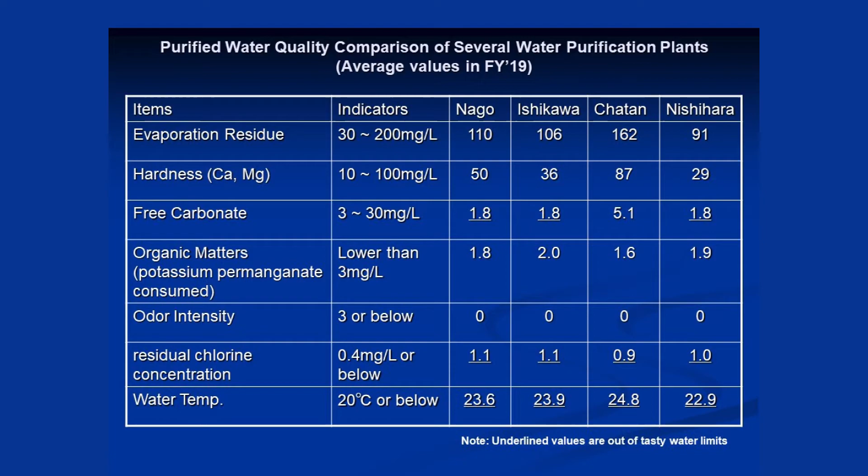Let me move on to the drinking water quality standards. I'll first talk about Article 4 of the Water Supply Act, followed by the basic principle in setting the standards, structure of drinking water quality standards, then methods and frequency of water quality tests.

According to Article 4 of the Water Supply Act, drinking water supplied through waterworks must meet the following requirements. First, it is not contaminated by pathogenic organisms, nor does it contain organisms or compounds that indicate pathogenic organism contamination.

Second, it does not contain toxic substances such as cyanides, mercury, etc. Third, it does not contain copper, iron, fluorine, phenol, and other compounds above an allowable amount.

Fourth, it is not abnormally acidic or basic. Fifth, it should not have foul odor, except that resulting from disinfection. Lastly, appearance should be clear and with no color.

Further details related to each requirement are prescribed by Ministry of Health, Labor and Welfare ordinances.

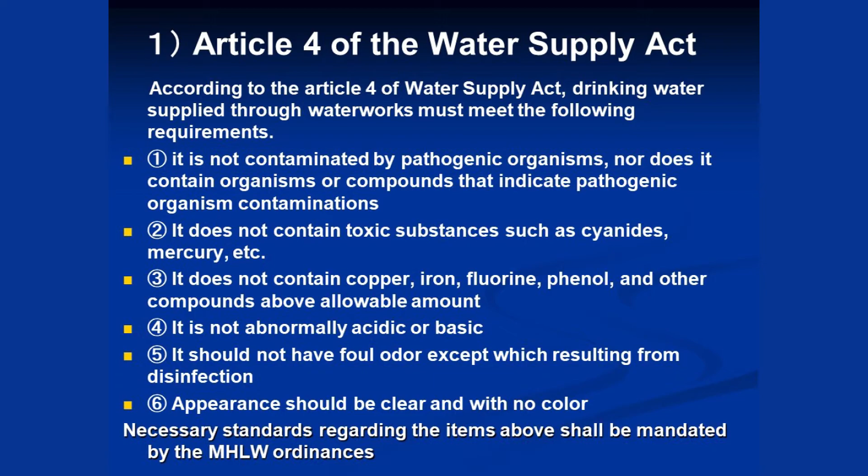Water quality standards are set under Article 4 of the Water Supply Act, and water suppliers are mandated to supply water that meets these standards.

In the water quality standards, items that are detected or can possibly be detected in purified water at the level of 10% or higher of the assessment value, which is equivalent to the WHO guideline value, are included. However, considering past history, chemical compounds such as mercury and cyanides are also included.

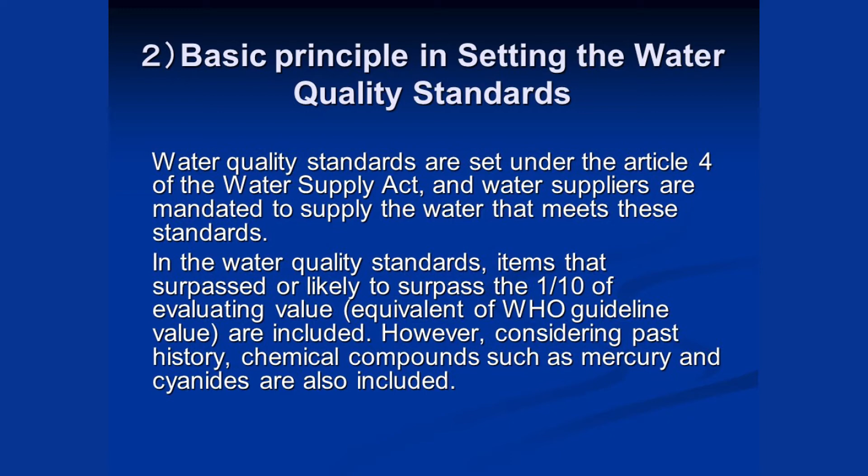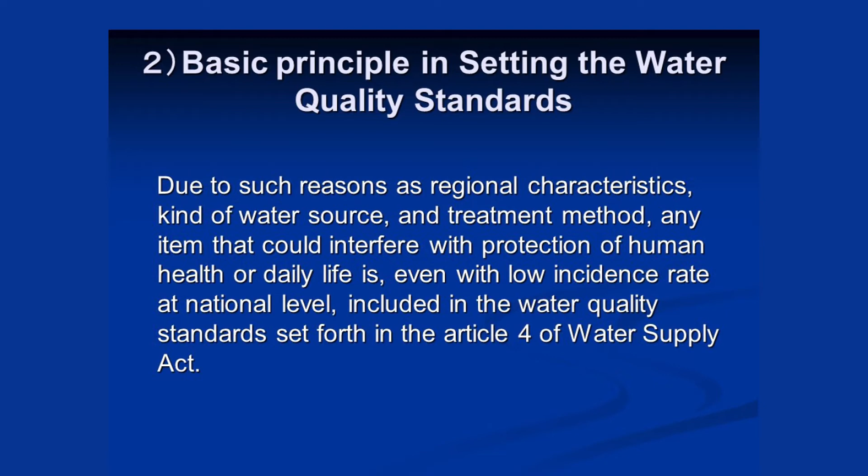In addition, due to such reasons as regional characteristics, kind of water source, and treatment methods, any item that could interfere with protection of human health or daily life is, even with low incidence rate at national level, included in the water quality standards set forth in Article 4 of the Water Supply Act.

Mandatory items in water testing required for all water utilities are limited to basic items. For the remaining items, some clauses in the Ordinance for Enforcement of the Water Supply Act permit each water utility to reduce test frequency or omit the test within reasonable limits.

Meanwhile, in order to ensure appropriateness and transparency of water testing, water utilities are obliged to draw up and publish a water testing plan required under the Ordinance for Enforcement of the Water Supply Act, Article 15, Item 6, with a list of items to be examined, or justification if omitted.

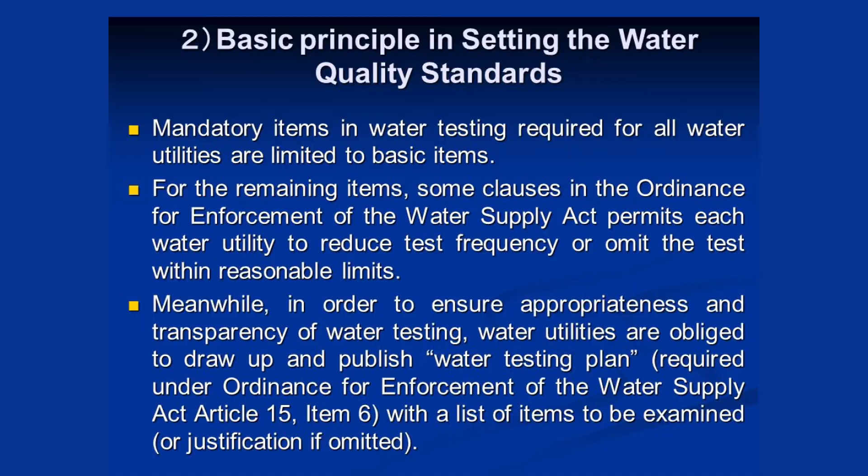The Japanese drinking water quality standard consists of 3 categories: drinking water quality standards, complementary items for water quality management, and items for further study. Let me begin with drinking water quality standards.

With the 2003 Ministerial Ordinance on Water Standard, drinking water quality standards were revised to include 51 items. The ordinance specifies standard values and testing methods used for determining water quality. Water utilities are obliged to supply water that meets these standards.

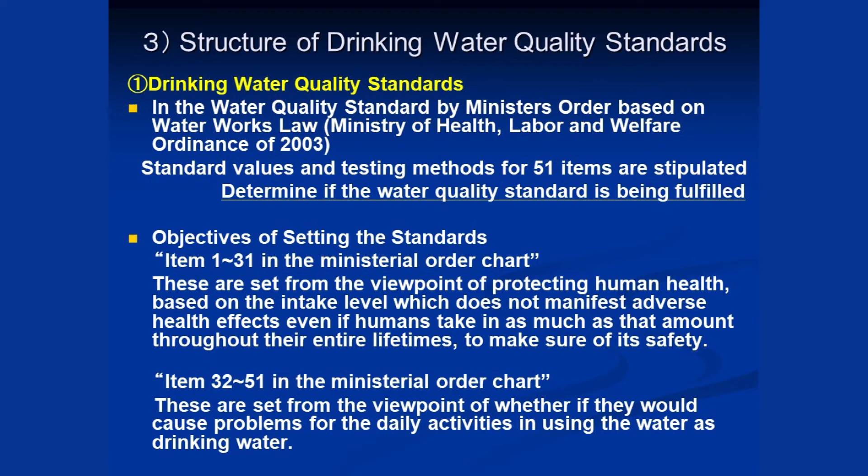Items 1 through 31 listed in the ministerial order are included from a health protection standpoint, based on the intake level that would not cause adverse health effects even with lifelong consumption. Meanwhile, items 32 through 51 are included as potential inconveniences for daily use, such as color and odor.

Potential inconveniences for daily use mean abnormal levels of color, taste, odor, foam, etc. High content of metals such as iron, copper, and manganese add color to water, whereas sodium and chloride ions influence taste. Meanwhile, anionic surfactants in detergents cause foam on water, and the presence of compounds such as phenol and geosmin causes odor.

Next, let me explain the complementary items for water quality management category. This category is created for certain items that require regular monitoring for water quality management, while they are considered unnecessary to be included in the drinking water quality standards, or their addition to the standards was postponed in relation to toxicological evaluations.

They have nevertheless been detected in the general environment, or have a potential to be detected in purified water in the future due to their large amount of use. In other words, this is a category for items with uncertain or provisional toxicity value, or insufficient detection value, for immediate addition to the drinking water quality standards.

Next, let me explain the items for further study category. This category is for items that cannot be classified into the two categories I've explained so far, because their toxicological evaluations are provisional, or their detection level and frequency in purified water are unclear. The Health Ministry instructed that necessary items be selected and tested in accordance with the local situation.

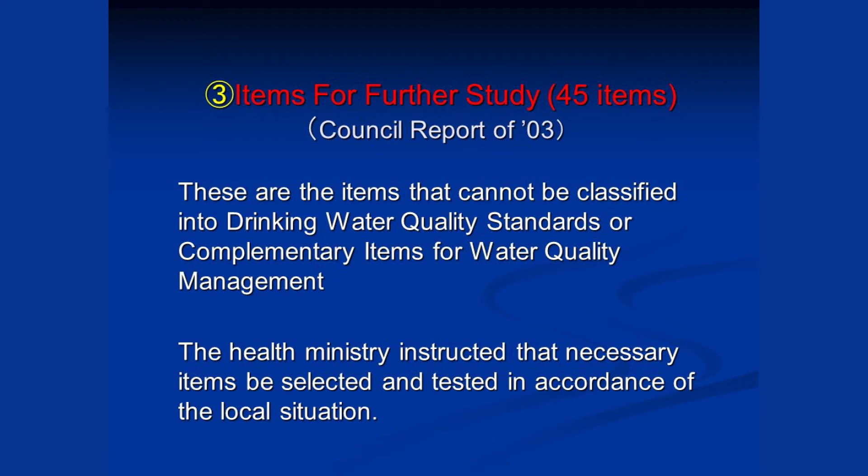Here are the current number of test items for drinking water. The drinking water quality standards have 51 items, in which 31 are related to health and 20 are related to desirable drinking water characteristics. The complementary items for water quality management have 27 items, including 114 agricultural chemicals categorized as one item. The items for further study have 45 items.

At our Water Quality Control Office, we conduct testing of 51 items for drinking water quality standards, 25 for complementary items, 79 agricultural chemicals, and 35 additional items that we independently designated.

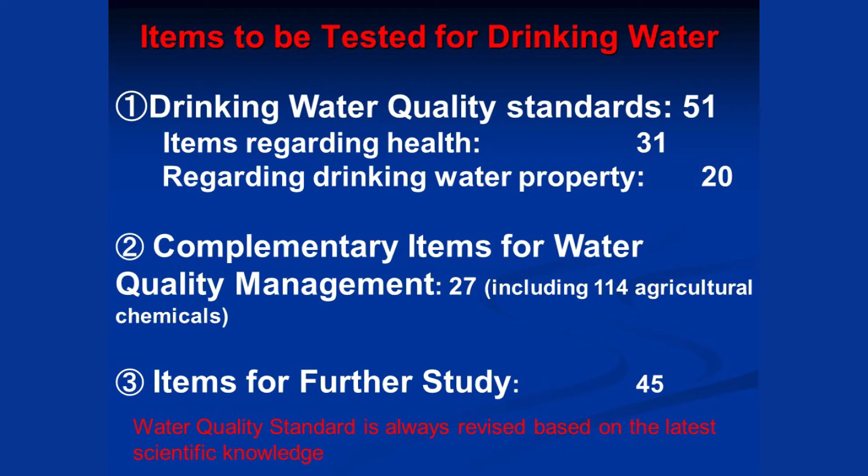When such information is obtained, they are classified into the higher complementary items for water quality management category. Then, whenever necessary, they can be reclassified into the highest drinking water quality standards. This process is reviewed every year with the latest scientific knowledge, and existing testing items and standard values are revised almost every year as well.

Let me move on to the next topic, our water quality management system. As a general rule, we conduct testing for items of the drinking water quality standards and the complementary items for water quality management by ourselves, for the following reasons.

Prompt response to pollution incidents. Reflecting test results to water quality management without delay. Maintaining and improving our technical skills, and prompt implementation of required actions for management.

When water quality incidents at water sources happen, such as mass fish die-offs, outsourcing water testing will take too much time for identification of cause and recovery. By conducting the testing by ourselves, we can respond to incidents promptly and avoid supply interruptions as much as possible.

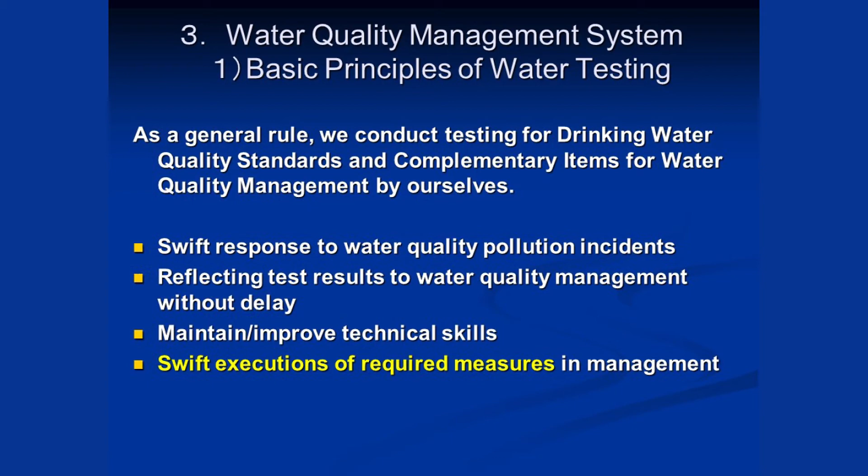Prompt testing also enables us to take required actions to prevent failure to meet drinking water quality standards and ensure safe and quality water supply.

As a measure to ensure accuracy and reliability of water testing, we obtained the WaterWorks GLP certification in May 2009. GLP stands for Good Laboratory Practice. The WaterWorks GLP is a set of standards for a laboratory to prove their proper execution of tests and analysis, and those labs that meet those standards are certified.

Apart from the WaterWorks industry, other industries such as food, pharmacy, and chemistry have also established GLP for their labs. WaterWorks GLP applies the concept of GLP to drinking water testing in order to ensure the accuracy and reliability of results from Japan WaterWorks Association certified water testing.

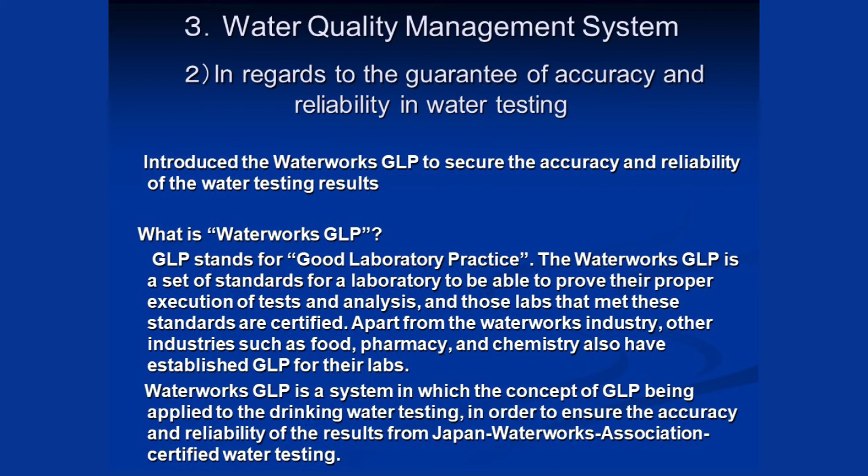OPEB's Water Quality Control Office manages water quality for all of our source waters and purified water. At the office, we mainly conduct monthly ministry-ordered tests for all source waters and regular tests for raw, purified, and distributed water from every purification plant. We also conduct research on source water management and treatment methods.

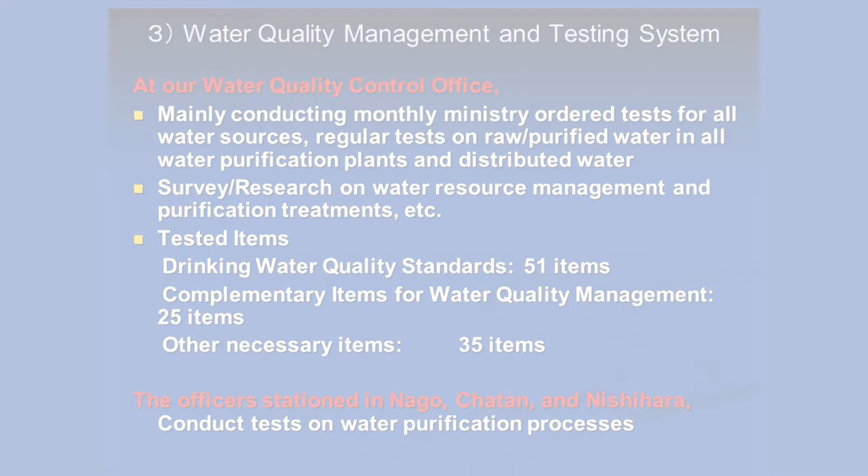In addition, Nago, Chatan, and Nishihara water purification plants have one water quality officer stationed for testing required during the treatment process, as well as for helping plant operators to solve issues with the treatment process. From here, I explain issues with our drinking water quality. Let me start with water sources. First, I'll talk about rivers.

Rivers in the northwestern part of the island are a good water source with no pollution from gray water or factory wastewater. However, we need to be cautious of red soil runoff after rain, which tends to cause an increase in turbidity and organic matter concentration, as well as occasional increases in the odorous substance geosmin. Regarding the Gabusoka River in the northern area, it is unsuitable as source water due to pollution with gray water. We discontinued water intake from this river due to issues of pollution, water flow rate, and saltwater intrusion.

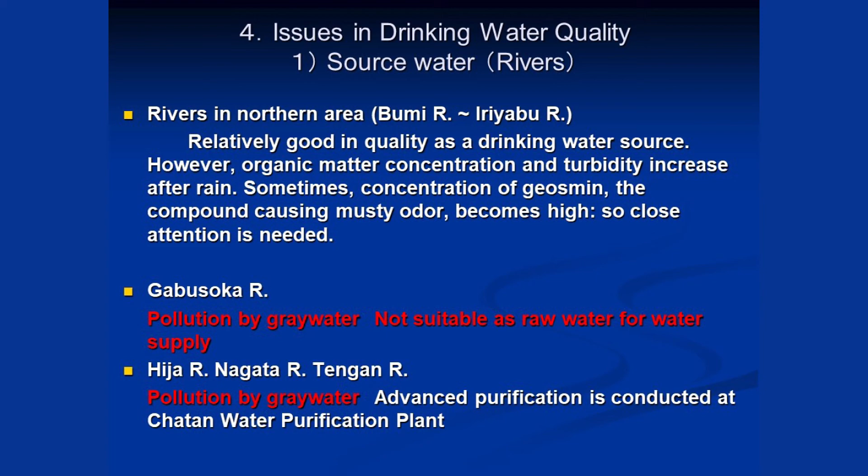As for the Hija, Nagata, and Tengan rivers, they are located in the central area of the island and are polluted with gray water and wastewater from livestock sheds. Influenced by Ryukyu limestone strata, their water also has high hardness. Water from these rivers is treated with an advanced water treatment system at Chatan Water Purification Plant and becomes drinking water that meets drinking water quality standards.

The next source water I'd like to talk about is dams. Dams used for drinking water sources include 9 national government-managed dams, 1 prefectural government-managed dam, and 1 OPEB-managed dam. 4 dams located in the north are integrated with Fukuji Dam, and the intake facility is located at Fukuji Dam. Water from Fukuji Dam has good quality and accounts for the highest ratio in our total water intake.

Kanna Dam's high organic matter concentration causes a trihalomethane issue with the normal treatment process. Water from the dam is therefore transmitted to the Ishikawa water purification plant for advanced water treatment. Kin Dam has a problem of intensifying pollution and eutrophication. Though its water is therefore unsuitable as a drinking water source, advanced water treatment at the Ishikawa water purification plant enables us to improve the quality enough to meet drinking water quality standards.

Water from the prefectural government-managed Kurashiki Dam, as well as the OPEB-managed Yamashiro Dam, likewise has high organic matter concentration, so advanced water treatment is conducted at Chatan Water Purification Plant in order to prevent trihalomethane formation.

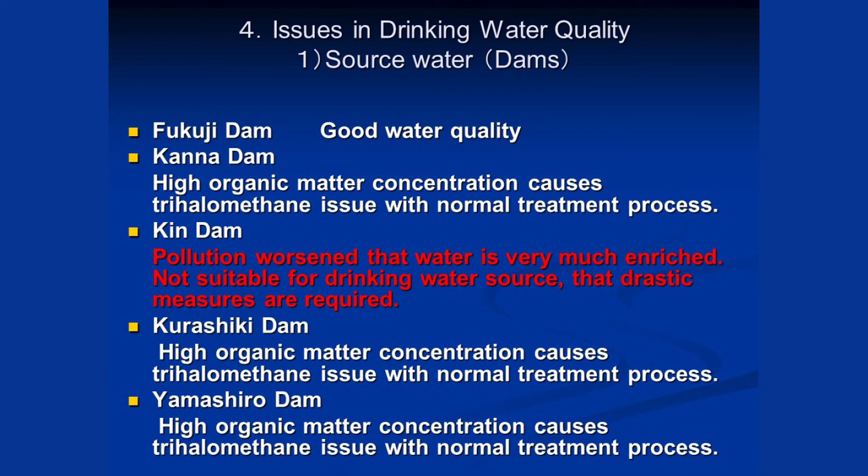The next water source I'll talk about is groundwater. We have a group of 24 wells located in the central area of the island. Although it doesn't have other problems such as turbidity, its hardness is quite high, 300 milligrams per liter, because the water is taken from a limestone aquifer. Since soft water is relatively more popular in Japan, a hardness reduction facility was introduced in Chatan Water Purification Plant, where the water from the wells is treated. We also have a mercury removal facility, since mercury pollution was found at some of the wells.

Next, let me explain the issue with bromate. Bromate is formed from bromide ions reacting with ozone during the ozonation step of advanced water treatment. Bromate is one of the items included in drinking water quality standards, and its standard value is 10 micrograms per liter. In terms of toxicity, some animal research reported that bromate caused kidney tumors. Raw water treated at Chatan water purification plant tends to have a high content of bromide ion, as much of it comes from rivers that flow through limestone aquifers.

Under the condition of high dissolved ozone concentration, treated water often failed to meet the standard due to the high level of bromate formed. Fortunately, we succeeded in resolving this issue by controlling the dissolved ozone concentration to lower than 0.1 mg per liter, thereby keeping the bromate level under the standard value. Ozonation was originally introduced to control trihalomethane. Failing to do so due to low dissolved ozone concentration was a concern, but we confirmed otherwise, even with a concentration of less than 0.1 mg per liter.